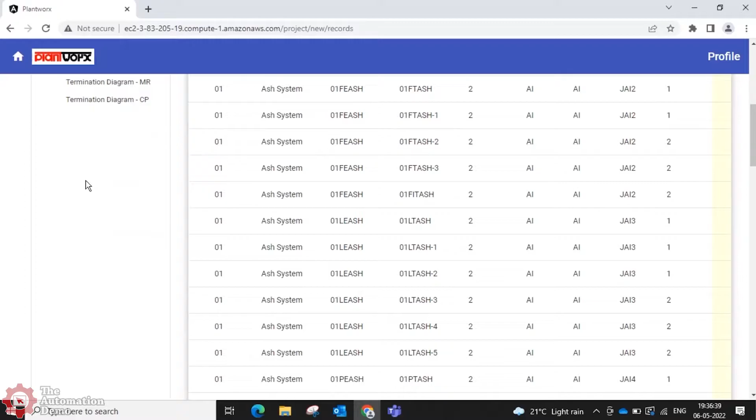Once you create a record like this, all the outputs come directly. For example, the instrument index lists all these instruments, with tabs for all the details: the P&ID reference, the loop number where it exists, the line number, and its process area.

It also shows the tag ID, generated automatically, and the device description showing what type of device this is. These parameters are set manually for setting the range, while all units of measurement are taken automatically, as we saw in the project configuration.

You also have the option of defining user-defined fields, or UDFs. If the user wants to add more fields, he can define them here. Navigating to the next buttons shows provision for more user-defined fields — the one we just added was IP44 for the last element.

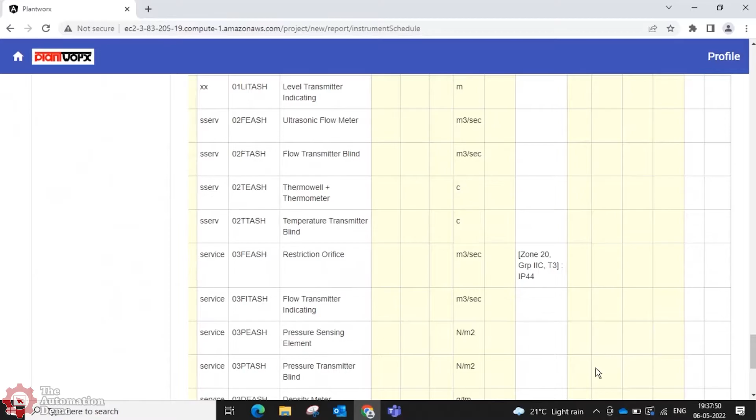All of this information is available to the user, so this is how instantaneously the instrument index output is created. You also get other details like the junction box schedule, showing the number of junction boxes used and all their details — also generated instantaneously.

Consultants basically need only these two pieces of information, along with the data sheets I mentioned earlier. This is the data sheet — so if you open it up...

The best part of this data sheet is it allows the user to download a template already provided by PlantWorx, or he could design his own template and upload it to the cloud. Let me show you an example of downloading the template for the O2 analyzer — this is the template.

PlantWorx offers more than 100 data sheets for users to select from, covering all the different types of instruments in the project. So this is how it looks.

It's Excel based, and if the client doesn't want to use the data sheet created by PlantWorx, he can always upload his own. For example, I click this button and it guides me to a new data sheet, where I go and select a data sheet from the library I already have.

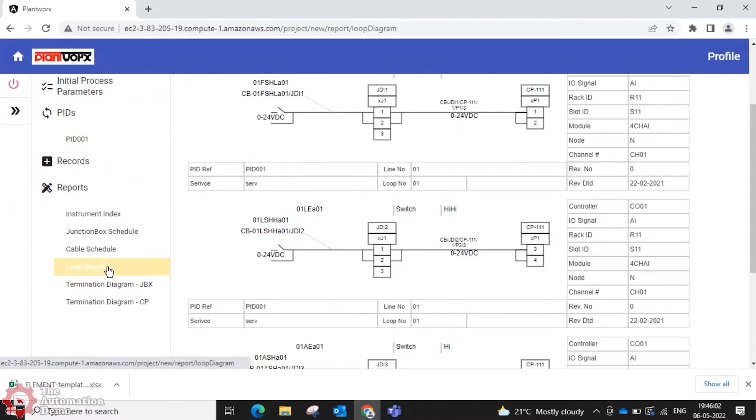Just see the clarity and the visibility of all the loop diagrams that you get. The best feature of PlantWorx, Shawn, is you could do maybe around 3,000 loop diagrams in a matter of 2 minutes or less.

You can also export this to PDF. What that means is you don't need a license for AutoCAD in order to get the drawings. You can see the clarity and visibility of all the loop diagrams, right? It gives all the details.

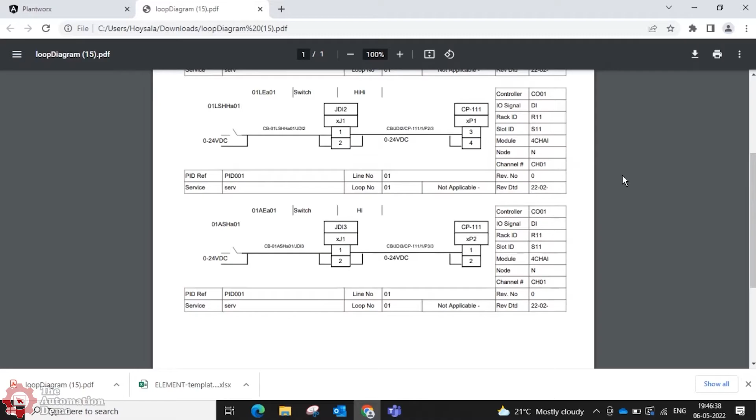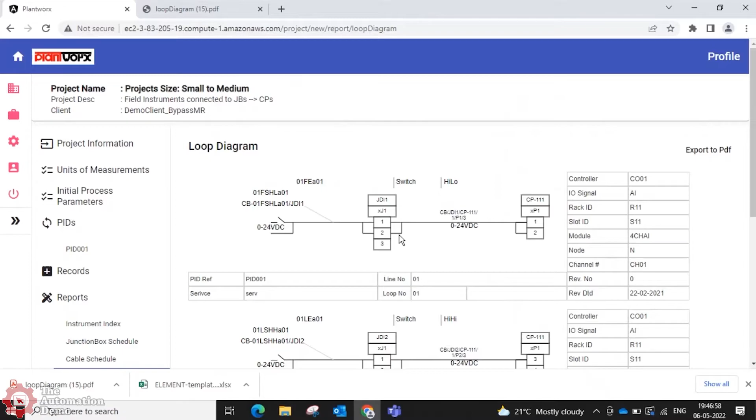The other thing about the loop diagrams, Shawn, is they can be customized to reflect the way a customer wants them to be seen. Say, for example, he doesn't want this way, he wants a different formatting, or two lines coming over here instead of one line. He can customize the loop diagrams the way he wants, and PlantWorx will do that for him.

Then we have the termination diagram for the junction box. See the speed at which it is done, and then also the termination diagram for the control panel.

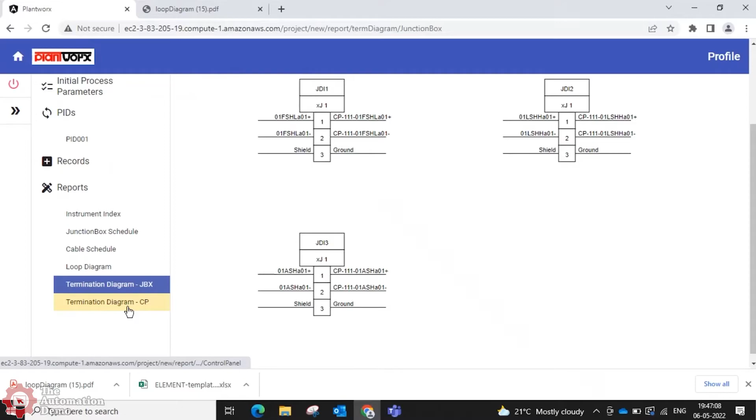I just showed you three records, but if you have say around 2,000 records, the time it takes to generate all of these outputs, which we see over here, the instrument index, junction box schedule, cable schedule, and all of this, is typically less than 2 minutes to generate all of them together.

The user will also get other outputs like PLC, DCS, IO listing. So what we have is only 3 instruments, right, and then there are 3 DI counts for this. So all of this is coming to control panel 111.

Then he also has a junction box consolidation over here, where it shows the type of junction boxes used for all of these instruments. There's a DI junction box, JDI1, JDI2, and JDI3 - 3 junction boxes, each having only one instrument, and each of these instruments is carried by 2 wires.

You can add a few more wires if you want as spare wires, and when you save this, you'll see the total number of terminals increases from the current ones to, say, 3 - so 2 plus 1 is 3. That's how it gets updated on its own, and you can also export this information to an Excel sheet. So all of the outputs either go to Excel or are stored as PDF documents. Any questions so far, Shawn?

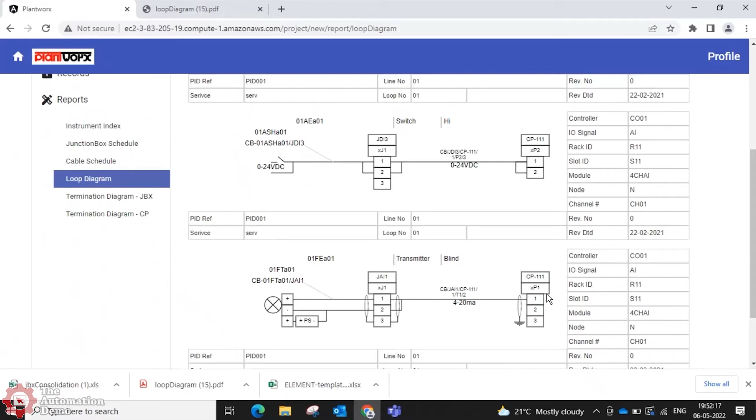So this is how easy it is. And the same changes are also reflected in your instrument index immediately. So you have a flow transmitter instead of a flow switch. And you also have a loop diagram done for the flow transmitter here instead of a flow switch, right? These are the two switches that we had earlier. So all changes are managed instantaneously.

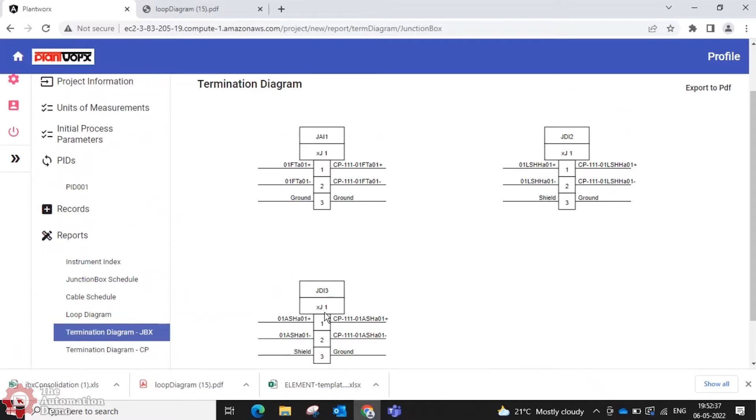These changes can also be seen in the termination diagram. So now you have a junction box for analog input and you have two junction boxes for the digital inputs, right? So this is how changes are managed instantaneously.

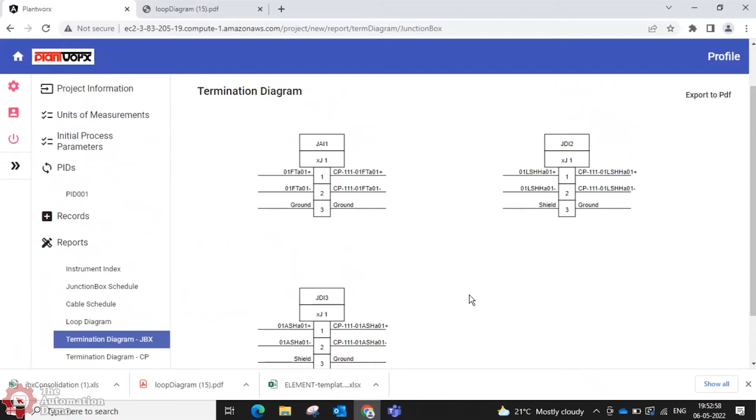You have any questions on this, Shawn? I think I'm running too fast on this. No, I think what you did all makes sense. You changed it from digital to analog, and once you saved it, that reflected throughout the entire project, all the way down here to the termination diagram. So yeah, that makes sense. Even if you do these changes on almost all of these records, it doesn't take any time to reflect those changes throughout your documentation, right? Yeah, makes sense to me.

All right, okay, so now let us talk about some features that we saw in PlantWorx. Right now, for the starters, PlantWorx is most user friendly. As you saw, you don't have to really navigate from one screen to another screen. The user does not have to open up too many windows and then navigate from one window to another window. He always remains in only one window.

That is one of the most important things here, which makes it very easy for the user to use the software, right? So because of the self-navigating feature that we just saw, the user will also not need to have any formal training on the product. It's just a matter of getting used to the product in 15 minutes' time. We also have some videos done on how to use the software for every step, for every stage. That is typically a 2 or 3 minute video for each of these tabs, and then maybe a total of 35 minutes video. That is all the training that the user will want to have, right?

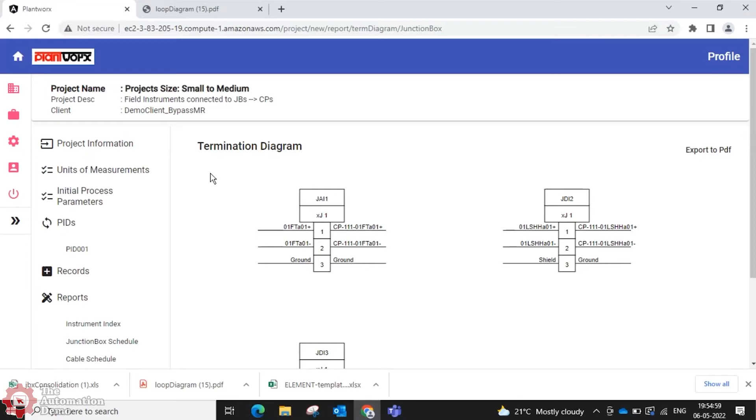And because the software is hosted on Amazon Cloud Services, AWS, Amazon Web Services, the user does not need to have huge servers, right? And the servers basically - you don't have to maintain the server. You don't need an admin staff to maintain the server. And you also don't need to pay a lot for the server in terms of the space also. So because of that, there's a lot of cost which is saved on the server part of it. The next advantage that I would like to highlight over here is the customization aspect of PlantWorx.

We just saw how easy it is to configure or customize the application for every client, and the user can also customize all the project parameters that he has. He can customize the initial process parameters, or he can also customize the way the process parameters are being measured, and he can also customize the type of the outputs that he wants to have. If someone wants a different format of the instrument index, we can always do it for him. So this is also customizable.

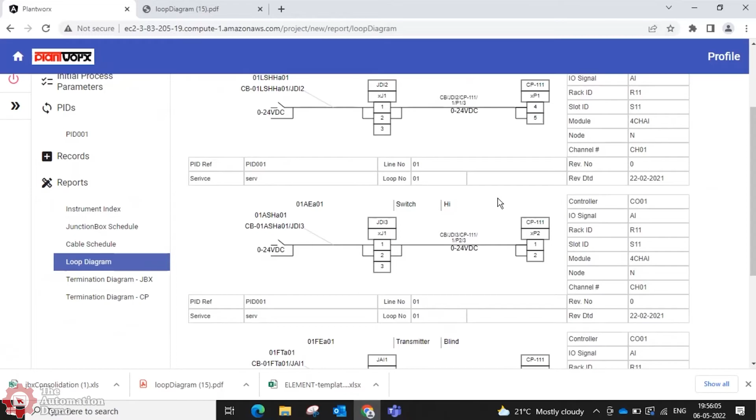He could use the user defined fields also and enter the data here the way he wants. The other customization aspect is he can customize the loop diagrams. Different people have different ways of drawing the loop diagrams, so he could do that here. The loop diagrams, yes, these are the ones. So he could also customize the way a loop diagram should look, right? So customization is one of the most important and inherent features of PlantWorx.

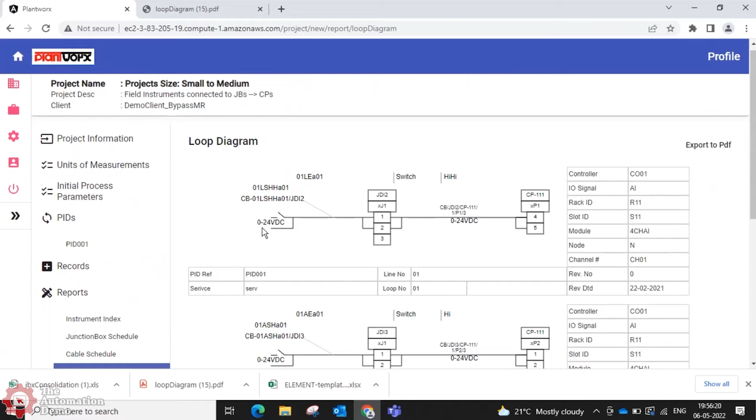In terms of speed, as I said, all these outputs are generated at lightning speed, right? This is typically a very simple loop diagram because it involves only the junction box and the control panel. But if you have a loop diagram with the marshalling rack also, even then the speed does not change, because we use the services of AWS and the high speed engines available on the AWS server. So all of these outputs are generated in a matter of just 2 minutes.

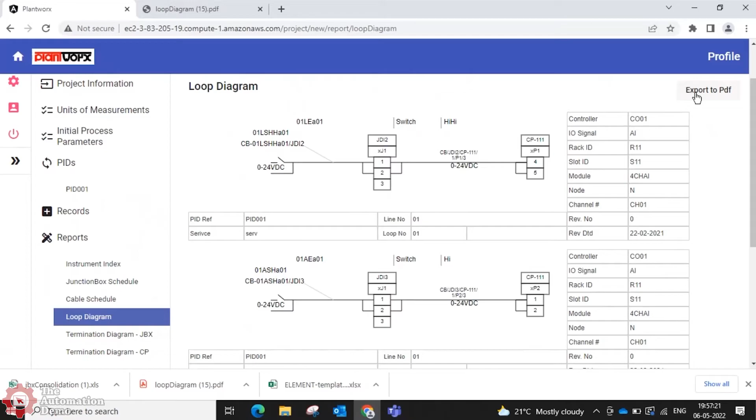Excellent. Now, as I said some time back, you don't need AutoCAD. There is a lot of cost the user has to pay for AutoCAD, right? Since all the outputs are generated in PDF format, AutoCAD is really not required. Even then, if the user wants an AutoCAD kind of output, he can always use special software available to convert from PDF format to AutoCAD format. So you don't typically require any AutoCAD in this.

Do you have any questions, Shawn? No, just an observation. When we look at a loop diagram, these are not very complicated drawings, right? But they do have a lot of text and information on them, so it can be tedious to work on them in AutoCAD. And if you make one small change to how you're going to label inputs or outputs, or you add one terminal, that's a lot of legwork in AutoCAD. So I can see the advantage here: I make a change and it just regenerates all the loop diagrams. Yeah, absolutely. As simple as that, right?

Now, the last point I wanted to highlight, Shawn, is that we talked about flexibility in technical terms, but we also offer a lot of flexibility on cost and affordability to the users of PlantWorx. The sole reason to invent PlantWorx is to make it available and affordable for any type of customer. We know there is software available only for tier one customers. If tier two and below customers want software like this, there is nothing available. They have to shell out a lot of money on high-end software.

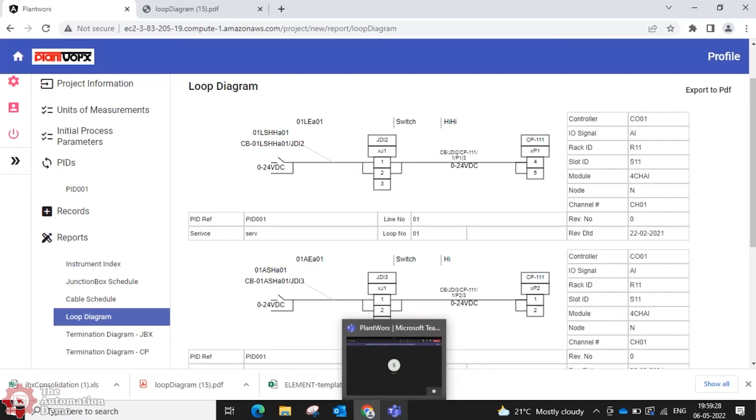So the price the customer has to pay for PlantWorx is also customized, in the sense that he can use it on a monthly subscription or an annual subscription. And not only that, the user also has an option to pay only for the features that he uses. So if it is a consultant, he may not want loop diagrams. He just doesn't input anything in these orange cells. He doesn't have to input all of these things.

He just has to do the P&ID right up to the junction boxes, and that is the end of it. He doesn't have to do anything else. So he gets all of his diagrams without going into the detailed engineering for his project, right? This is one of the best features of PlantWorx. And that's really what you said when you created the software: the tier one customers have very large budgets, so they can afford very expensive solutions. Absolutely.

But like you said, there's nothing for those tier two and below customers who don't have huge budgets for this type of software. And so you make it available on a monthly or annual basis at an affordable rate for those tier two and tier three and lower customers.

Perfect. Yeah, that's the whole essence of doing PlantWorx. The whole idea is to make it available for customers who work only on 200 and 300 IOs, and yet they have to spend months on doing the engineering, and then the change management comes along with that. That takes much more time than doing the project itself. So, in order to cater to these lower end customers, PlantWorx has been a perfect solution.